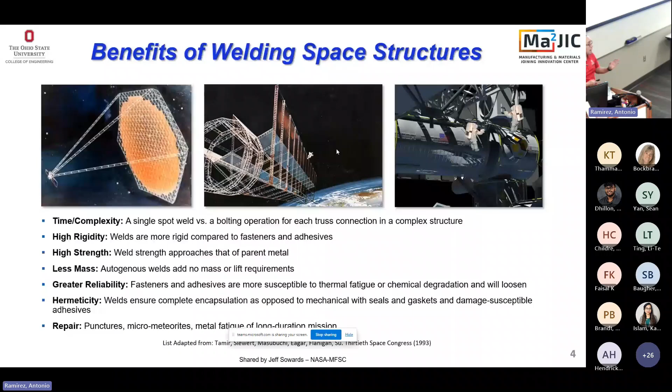You are going to Mars and something like that happens in the middle, there is no way back. There is no gas station to stop by and say, can you replace that tire for me? So this technology is absolutely needed for what we're doing. And let me give you an example.

I know it's too many videos running there at the same time, but I actually took the volume out, so I'm sorry about that. Okay. Do you want to turn it down? It is okay. How can I? I can do that while you talk.

Okay. So let me give you an example. Fuel storage, refueling. So it's the video running in the center, and there are different companies doing it right now.

The picture on the, it's okay. Thank you. Right there. There you go. I appreciate that.

So we have in here, this is literally a module coming and refueling satellites. This is a company that already has contracts to actually refuel satellites. This is a European program. Right in the middle of the center, there's a European company actually trying to develop that as well. When we go to the moon, we need to build infrastructure on the moon, and maybe in a couple of decades on Mars, we need to start welding things in there as well, or repairing things in there.

And this one here on the top left, this is the Air Force. They are developing a program where they actually collect sunlight with very high efficiency photovoltaics, and then they have a system that can send a radio frequency signal down, and you have a converter on land that can produce electricity out of that.

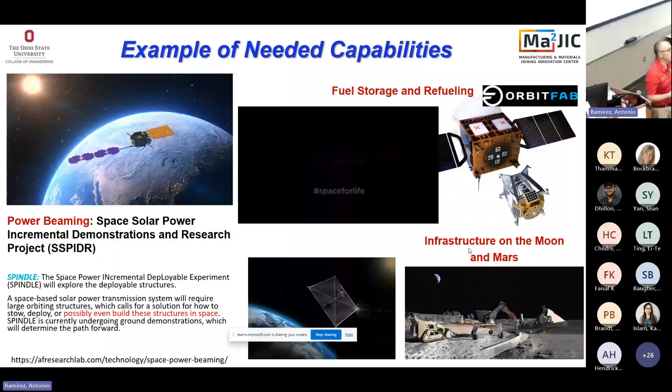Once you put it in space, there is no weight, okay? There is no gravity. So you can make very long structures that are just going to stay in there. So it's quite efficient to actually be able to build things in space as well.

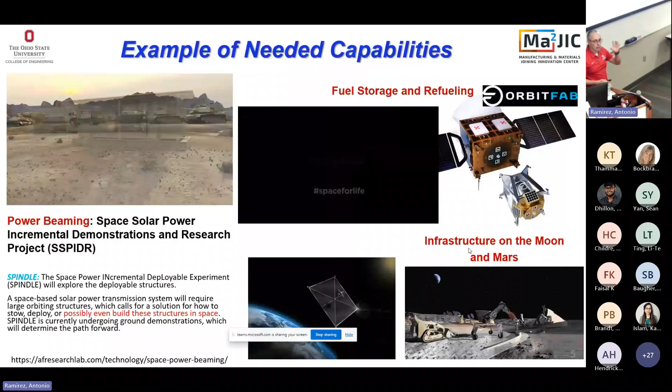So there are so many different necessities: defense, economic, and space exploration as well. So what happened is welding has been a very important part of the space program from the very beginning. And this is a very nice historical note: Von Braun was the guy who put Marshall together and ran it and took us to the moon.

So he had some other of his former colleagues from Germany working with him, and this one was managing some of the welding work for him, saying, I'm so sorry we have to bother you with all these welding problems we're having. And he answers to him, no, I don't mind about that. A lifetime in rocketry has convinced me that welding is one of the most critical aspects of our whole job.

Guess what? You go today to SpaceX, they're going to tell you the same thing. You go back to NASA, they're going to tell you exactly the same thing. Because what? A lot of the failures and problems they have are on joints. So this is a very important technology for them, and we keep working on that.

What happened is, welding looks like a spark. You think this is just a spark. It's very complex. You have the whole process of metallurgy, from melting a material, solidifying, and getting to use, happening very fast, within seconds. And we are trying to get this material as strong as it was originally, as it was designed

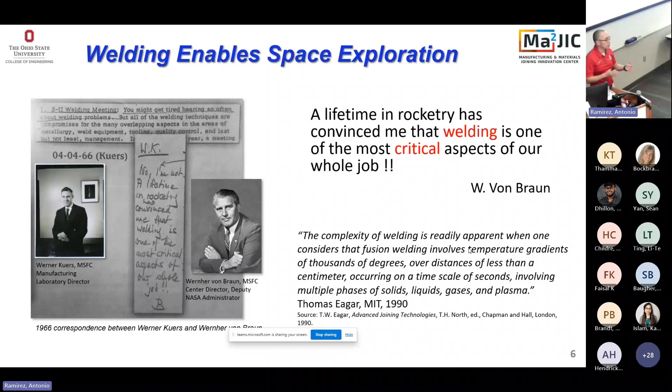with a thermomechanical process. In welding, we don't have that luxury. So we have to be a lot smarter about that. So it's complex technology, and that's why we have a welding engineering program at Ohio State, okay? Because there's complex science behind this.

Okay, so let's get back to space. When you are in space, these are the things that change: gravity, atmosphere, and temperature. So depending on where you are, the temperatures can vary, the gravities, and the vacuum levels. If you are in deep space or in low orbit, you actually have different vacuum levels. When you are in deep space, you are in ultra high vacuum. That's even very difficult to reproduce on Earth, but we can if we need.

These things are very easy to reproduce in the lab. Gravity, there are different ways to do it. One is you can put your experiment on a parabolic flight. These tickets are expensive. You can use a drop tower, and for biological systems, they use a random movement system where they kind of simulate a little bit of microgravity. It's not quite that. That doesn't work for the kind of experiments we do.

Okay. And the thing is, all we know about materials processing and welding, everything has been benchmarked on experiments that we run in our lab, under gravity, under regular thermal conditions, normally not under vacuum. So you will say, okay, just go into your models and make gravity zero, make pressure zero.

Guess what? Our models were never calibrated for that, so we don't know if they're going to work or not. The only way to know if they will work is having data to compare with. That's the data we are trying to collect. Okay.

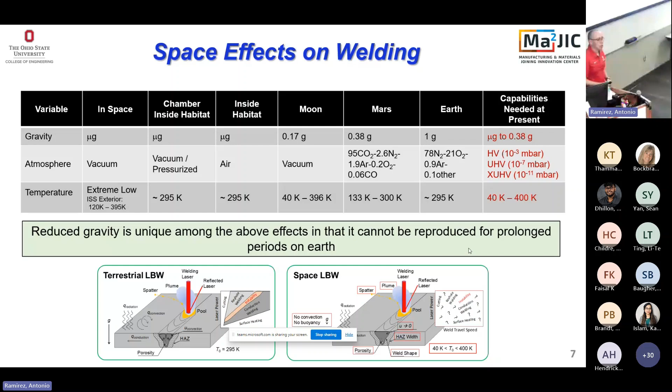So it's not new. People have been trying to do welding in space for a while. The first ones to do parabolic flights were the Russians. They did the very first experiments on parabolic flights, the Russians in 1965. I wasn't born quite yet then. The first experiment in space was also the Russians, on the Soyuz in '69. I was 1 year old at the time.

The first American one was actually in Skylab in '73. Guess what? Until last year, that was the last welding experiment the US had done. 51 years without doing almost anything. And what they did at that time was a very simple experiment, electron beam welding in space. We realized it does work, but it doesn't work the same as it works on Earth. That was about it.

Guess what? NASA managed to lose most of the data for these experiments, because at that time everything was on paper. They do have some data, but not all the data from that. And that was expensive. More recently, there are some other parabolic flights and other experiments happening.

We had an experiment that was international: Ukraine, US, and Russia. We're going to do this on the Mir. It was flown. The astronauts said, no, we're not going to run it. It was electron beam as well. What happens is when you shoot electrons at metal or matter, you decelerate the electrons and they generate radiation, high-energy radiation. So the astronauts were smart enough to say, we're not running this. Our clothes don't protect against that. So they didn't run it.

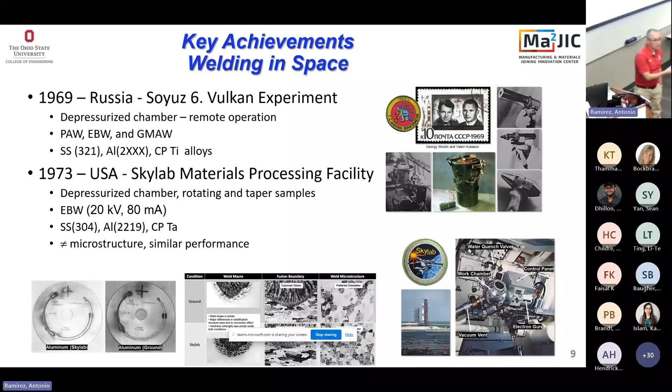Okay, everybody knows what the Skylab was? You see only the old heads are moving, as we had other space stations before. And the Skylab was the American one. I have to Google it as well.

Later on, the Salyut, as I told you, these Russians, they are great. This lady, I will not try to pronounce that name. Savitskaya. Say it again? Savitskaya. Savitskaya, I appreciate that. I'm going to record that so I can say it next time.

They actually went out on a walk, they brought this torch, and they did some welding outside with electron beam again. As she was welding, the sparks that you see flying when it welds, they had to pick them in by hand, because these things come around again very fast. This was a several-hour walk, and they did this in outer space.

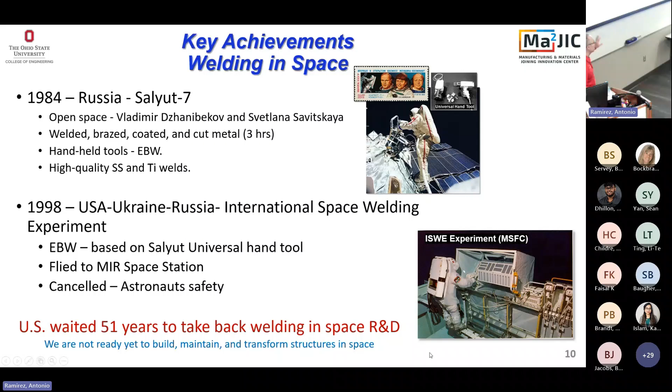I told you about the one that was canceled in the US that was going to be run on the Mir. So we waited 51 years to run more experiments, and we are working with NASA and the Air Force to make that happen. These are some examples of the things that were done at that time.

Everybody is asking, is electron beam the one it should be? Do you have any idea what is one of the most expensive things in space? Power. Power, exactly. You can actually run electron beam out of a battery. The problem is it generates high-energy X-rays. So if it's a robot, it will be okay, but it will damage other things. Laser at that time wasn't a possibility. It used too much power.

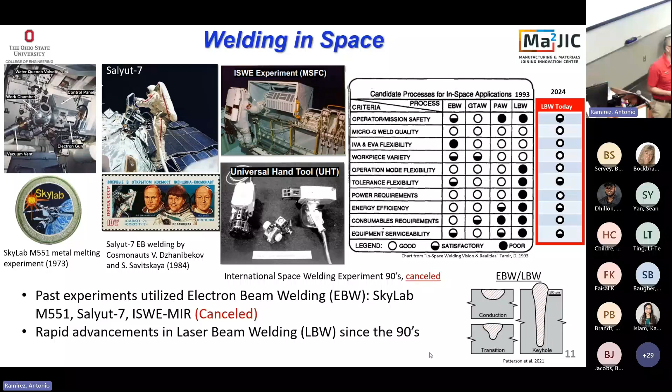Lasers are getting better. So now laser is a viable technique, and you can use it for other things as well, like basic materials inspection, things like that. A lot more difficult with electron beams, and that's what we are trying to do right now. So the status is success. We can use different processes, listed in there.

And we tested this recently. This is our old slide, you realize. We tested this in August last year. We showed that it's doable. It works very similarly, but there are some changes. There is some cracking that they couldn't identify. They found differences in microstructure, like the crystals are slightly different as well.

So there are some questions. This is going to affect the performance of the joints. What is the physical root cause of these differences? Some of them we can guess, but some are not very clear. Actually, I'm going to show you our current results. We haven't figured out what is different.

The other thing that I mentioned to you guys, now we don't have to launch things. We can put them together over there. So we don't actually need an enormous strength, unless we are building something that is going to land in another body and be launched again.

That's different. Okay. And there are human operation challenges as well, like, for example, radiation and laser reflections. You get a reflection, and that's why in the lab we have to use special glasses, special clothes as well, special walls to protect ourselves. Could be an issue as well.

The other thing is, when you shine a laser in a material, any idea what happens? It is melting. What else is happening? Come on, guys. Reflecting. Yes, you have reflection of light, absolutely. And besides that, it's very hot, then you have evaporation of material. And this is a vacuum. If you have air, then you create a plasma, actually, with the gas in the middle.

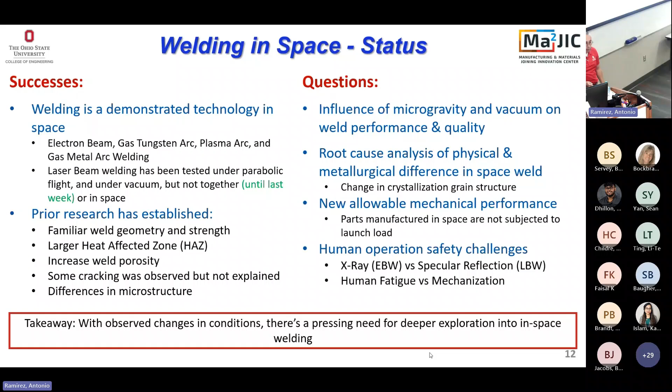Now this metal is evaporating very fast. What is that? That's a thruster. So now you start doing laser welding, you start moving things in space because you just created a thruster. So we are doing experiments with NASA on that as well. They have a special facility with a very flat floor, so we can actually measure that energy coming out. So all these things have to be taken into account when we are looking into that.

Okay, so for that one I need the sound. How can I put it back on? Go to that computer to exit out of the PowerPoint. Sorry, exit the PowerPoint. Yeah, the computer sound I turned down. Oh, I got it.

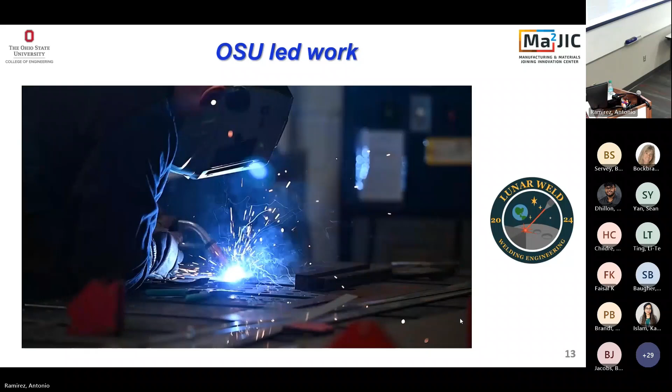This is my colleague, Lloyd Fanzo, welding engineer. He's the laser guy. That's not laser welding. That's gas metal welding.

Okay, so what is our contribution? We are trying to mature the TRL level. Welding in space is possible. That has been proven already. So we want to test how this goes. We're creating instrumentation so we can collect a lot of data during our experiments, and then we can understand the weldability of these materials under space conditions. The space conditions I mentioned are the gravity, the vacuum, and the extreme temperatures.

So we can actually go back to our models. I mean, it's not only in your area. When you get to welding and material science, we understand the physics so well. We can model almost everything. Not perfectly, but we can model things. We just need data so we can calibrate our models and figure out what is happening.

Think about this. You're shining the laser, you're creating a weld pool, the material is melting, and it's very hot, correct? This metal actually starts moving. There are different forces involved. One of them is buoyancy. It's gone. Not buoyancy anymore. So all these forces are changing, and how this is going to behave, how this is going to change at the very end, how they perform that job. So that's what we are trying to understand.

So that's a laser weld being made there. It's very fast. So we're going to be collecting all this data so we can at the end do all the modeling. The modeling people are working with us already to see how we can actually benchmark these models better. Because today when NASA or SpaceX is going to weld a piece that is going to launch, they do so many experiments, they try so many times. At some point they get it right.

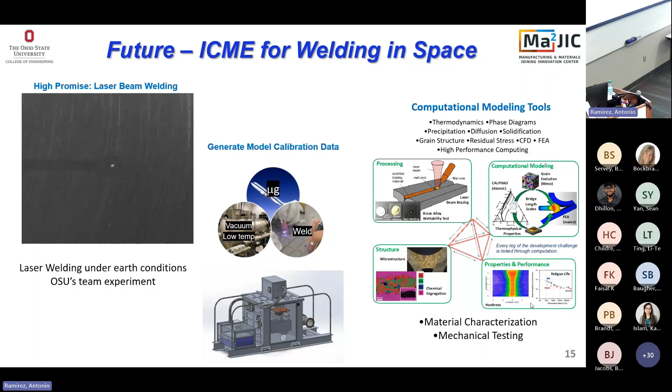In space, the first time, we have to get it right at once. So we need very solid models. Because the astronauts going to Mars are going to call us and say, by the way, we're having this problem, we need to fix this. You guys thankfully gave us this toolbox that will make the welds for us. Can you help us repair this? There's no way to do tests. We have to go ahead and model and give them a result within a few hours. That's what we are being prepared for. Okay, so this can be done.

So that's the chamber we built for that. Okay, we can do vacuum, 10 to minus 5 torr. It's all dry vacuum. It's like low orbit vacuum inside the station when they open a pipe, for example. Okay, we can do variable gravity on a parabolic flight. We can change temperature with our chamber as well. No big deal for us to model that, but we still want to check.

What happens is, for example, you get aluminum and you put it at very low temperatures, the thermal conductivity changes dramatically. It's not linear. So how is this going to affect it as well? That's important. No one has cared about doing welding of aluminum at very low temperatures. We normally don't do that. So we need the data as well. Okay, we're collecting tons of data, thermal, imaging. You can imagine we are collecting it. It's important for us as well. And now we're doing the post-weld analysis as well.

So any idea how the parabolic flight works and why you get microgravity? Trying to explain. Well, based on the position you are in the parabola, eventually you'll get to the point where the aircraft starts to dive, and at that point the astronaut trainees or whoever's in there start to float upwards and can simulate the microgravity environment. Yeah, absolutely.

So when the plane is going up, the plane is literally accelerating you together with it. And when the plane changes and starts turning back down, your body keeps going up. That's when you feel the microgravity. Okay, and the whole thing that is on that plane feels the microgravity. It's that simple. But you only get like 10 seconds of microgravity, and the next 10 seconds you feel like you're going to throw up, because you're going from zero gravity to almost 2G within seconds. If you don't have experience, as we don't, pilots do, you cannot even stand because it's 2G, it's not 1G anymore.

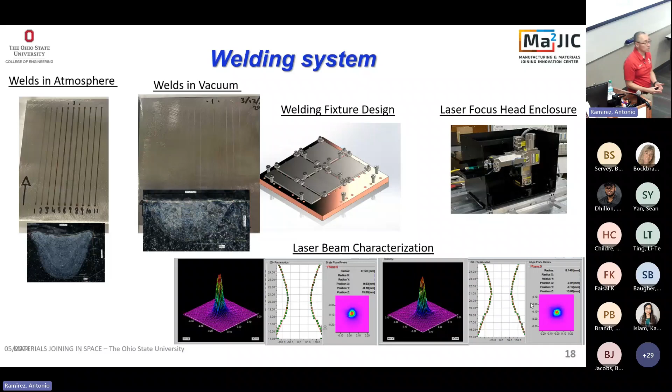And that's how the chamber looks inside. These are some of the welds that we did, and we are working on the model at the same time as well. These are the plates that we're putting. We are actually welding stainless steel, titanium alloys, and aluminum alloys, the most relevant ones for space applications. They do behave quite differently. All the students working, that's being made actually at 10 to minus 5 torr to try to control the position. So that's how it goes. It's very simple. The laser is fixed, it's the parts that move. Okay?

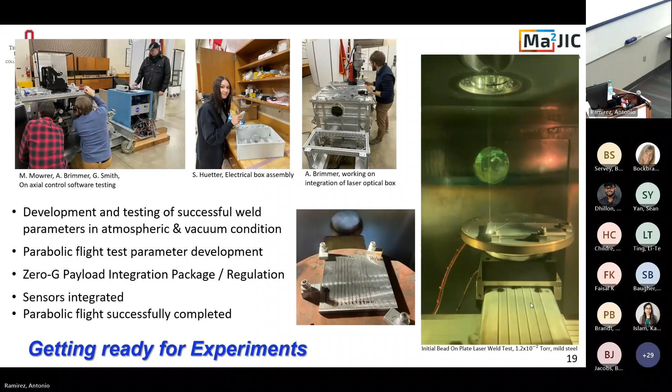We are doing workforce development at the same time. We are at a university anyway. We do a little bit of science, let's be honest. But our job here is educating you. That's our main job at the university. And when we are doing that, we do some research on the side. Even if we think we are all scientists, if you really want to do science, go to a national lab. That's where they have the resources to do it. I come from one, so I can tell you it's quite different. So we have all these different capstone students working with us with different impacts on the project.

And the good thing is many of them are the graduate students working with us. Some of them we actually rehire as engineers to work with us. Let me give you an idea. Like this guy here, Grant. See, he should be right here, the tall guy. The middle of the flight.

Remember, between parabolas is like 3 minutes, and only like 2 minutes, 10 seconds of microgravity. We're on the first parabola. Guess what happens? Microsoft, the computer crashes. Oh. Yes. First parabola. At that flight, it was going to be 40 parabolas. At that point, if it doesn't get back, you lose it.

These guys, between parabolas, feeling really bad, he was able to go there and fix the problem with the software. We lost 2 parabolas. That was it. And that's possible because we build our own software. You could hire a company to do this. Most people do that. With that, you lose the whole thing. That flight is $100,000. Okay?

So they have been instrumental. These guys are so smart. They work so hard. Right? Okay. These are the guys.

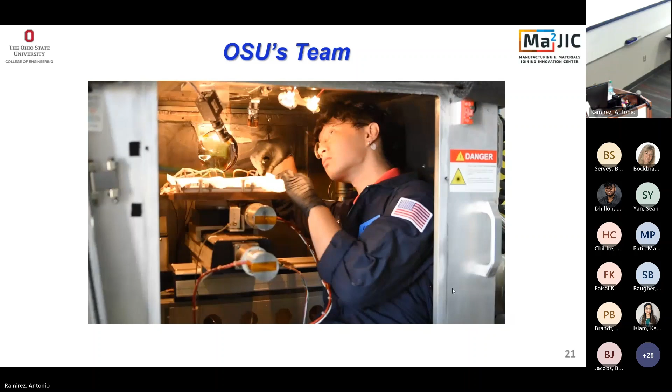Commercial part. And you can feel my British accent. Okay, let's make this funny here.

So that was the flight we did with the experiments. We were flying with the NASA people as well and the Air Force as well. And that's right during the flight, how it was going. So you realize most people there are just having fun. I was supposed to be in the back looking through the window. I don't remember a thing from that flight. Okay? I don't remember a thing.

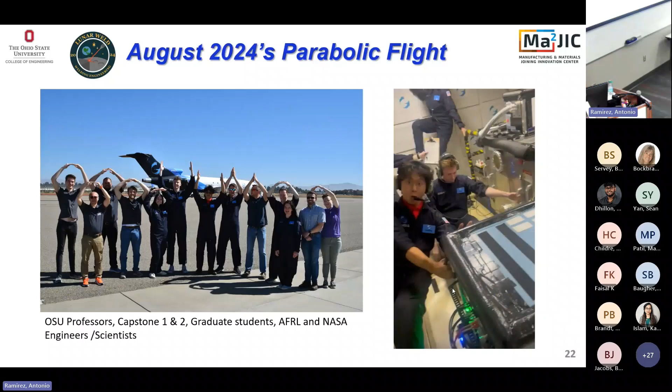Okay. When we go to aluminum, and we also forgot to say that, we also did lunar gravity. Now NASA is very interested in the moon as well, but it's like 20% of the Earth gravity, and Mars is like 40% of the Earth gravity. So we do have changes in there as well. When we go to aluminum, it's the opposite.

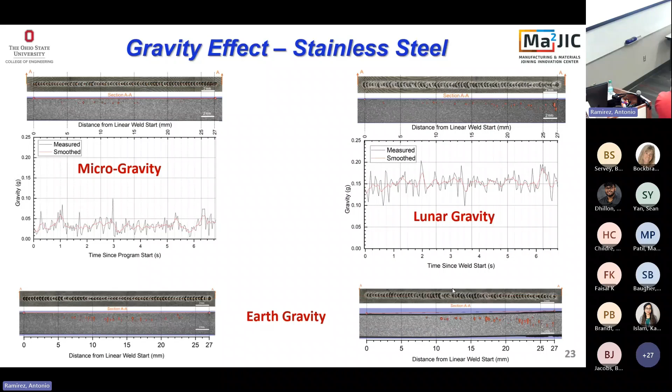So now we are modeling because we really don't know what it is. It is not that obvious, like making gravity zero in an equation, making temperature whatever you want in an equation. It is more complex than that, and that's what we are seeing. So we are working through this right now.

These are some of the microstructures of this 316. So this is pulse laser welding. We do pulses and keep moving. So think of this like a wine glass, and you overlap them. That's how it looks. And so this is like the first wine glass. This is the second that is slightly overlapping.

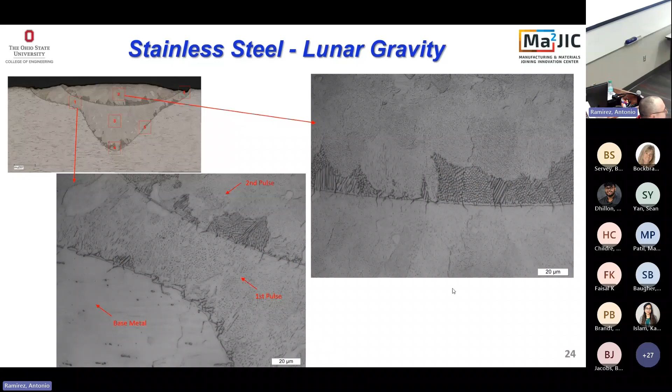And the solidification changes. We solidify so fast in this process. We change solidification mode. That means it may crack. And initially we thought these were all cracks. So we went to the SEM. There are no cracks. There's something else going on. And now we understand this is going to change the solidification mode as well. It's going to change the crystallography. May this have any effect on performance?

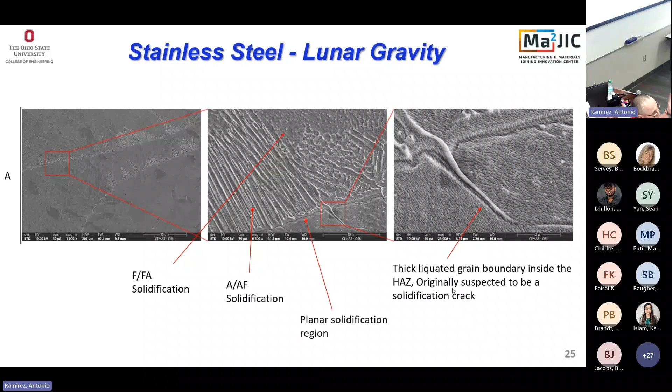We don't know. But I'm a metallurgist. I'm more interested in the science than the final performance at the end. I have to be honest. Okay, performance will pay my bills, but I'm more interested in what happens with the crystals in there.

So we've done this. We created instrumentation. We can run it. We are reproducing the space conditions, and now we're working to go here. We kept working on this for a while, and now we're working on something around $5 million to be able to build a smaller experiment that we can send to the ISS to do longer-time experiments over there and be more relevant.

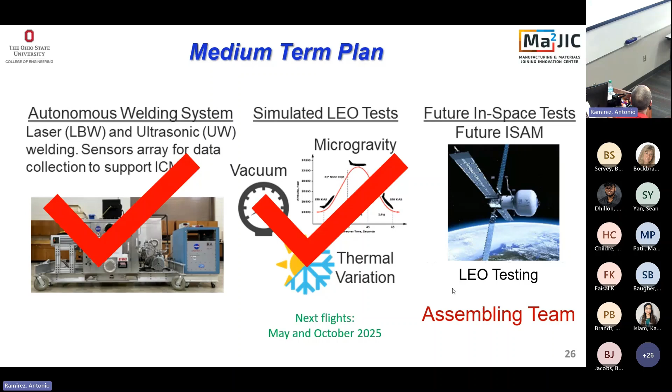Okay? So that's what we did in August, our parabolic flight. We are changing some things to improve, and doing some other things we didn't have time for. We have two other flights, one in May and the other one in October this year. We're also exploring other processes.

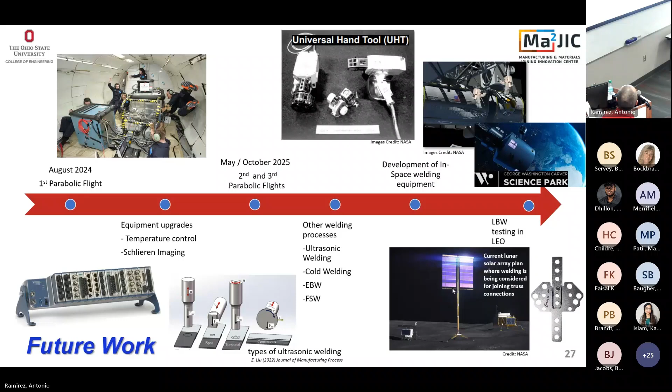Okay, and we just got some money from the college, and we applied for money from the university just to design a system to go to space. Because we need a pre-design so we can go to the agency and say, give me $4 or $5 million to build this. So we are working with them on that as well. Okay. That's where we stand. Okay.

NASA is also building a smaller chamber, so we are supporting NASA Marshall at the same time. They are building a small chamber. They're going to put it on a rocket to do a very short laser welding experiment in space very soon, within a few months. They are learning from us. They're seeing everything that went wrong with us, so they don't make the very same mistakes. So it's been instrumental for them as well.

And now we are working with NASA, ISS, Air Force, to develop the payload to go to space. That takes a lot of money, okay? And literally, when I say 5 or 6 million, we have no idea how much it's going to cost. And this doesn't include the ticket to get to space. It's just to build instrumentation that is certified to go to space, okay?

The flight could be, we could go to the space station before they retire it. It's going to be very soon, 2030, my understanding. That may change. But you realize that the Russian part of the station is literally falling apart. Okay, they haven't been able to maintain it properly, so it is a risk, a very high risk.

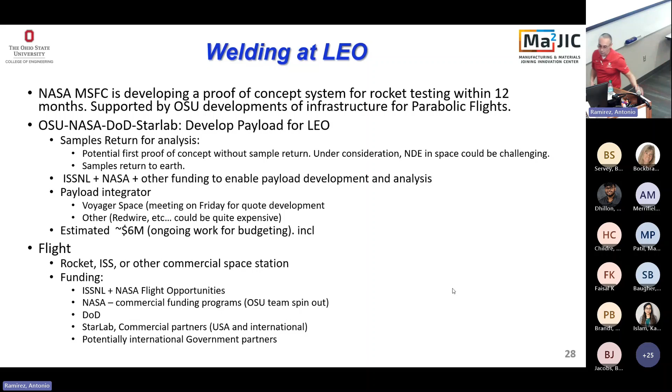But there is some instrumentation on the ISS they are trying to use, and, for example, the Europeans just flew a laser system to do this in space. We contacted them and said, "Can we use your laser?" No, we can only work with Europeans. So we are trying to work through NASA to get access to that, so we don't have to fly the whole thing. So politics goes everywhere, and we are trying to put all the things together for that.

The future will be, we need to get into robotics. It's not people doing this, it's going to be robots. And then we have to involve other organizations to make that possible. There is a national lab already working on robots for this kind of work in space, okay?

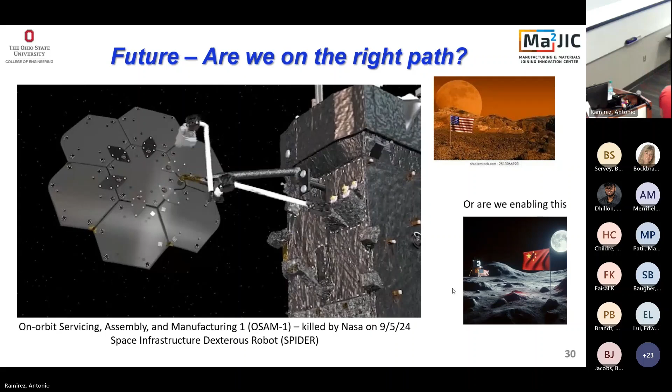With this, my question is, are we on the right path? So this program didn't happen, unfortunately. This was just canceled in September last year, where they were going to put up a satellite that would do some manufacturing process in space. This may change, but it was killed. It was recently killed, the program for that. So are we going to do this, or are we going to enable this? That's my question.

Our budget is tiny compared with the budget that, for example, the Chinese have to make this happen. And money here is important, guys. I mean, if I had the $5 million today, we'd be designing the system to go to the ISS already, or we'd be flying a year from now. But my problem is 80% of my time is trying to find that money.

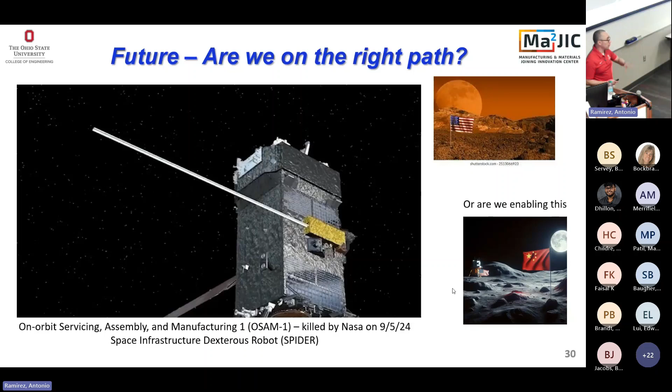Okay, so we need to make a difference here, and hopefully, even with all the craziness that is going on right now in our country, some of these things will change. And this is where we want to be very needed. And this looks like science fiction, but this is exactly where we want to get.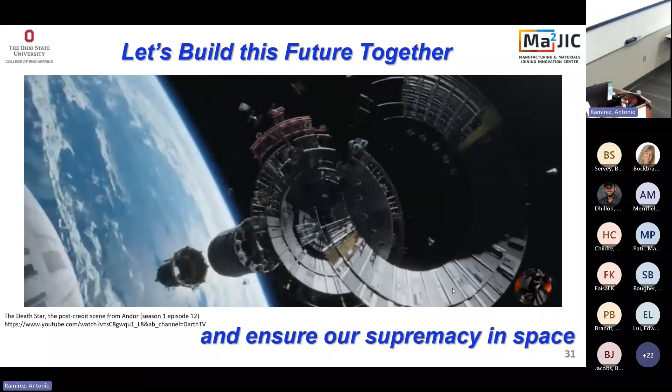Yes. Space station. With welding, we can build things of that size. I don't know who's going to launch the materials, but we can build it.

And don't ask me if I got the permission from Disney to show this. Okay, but it's just a beautiful thing.